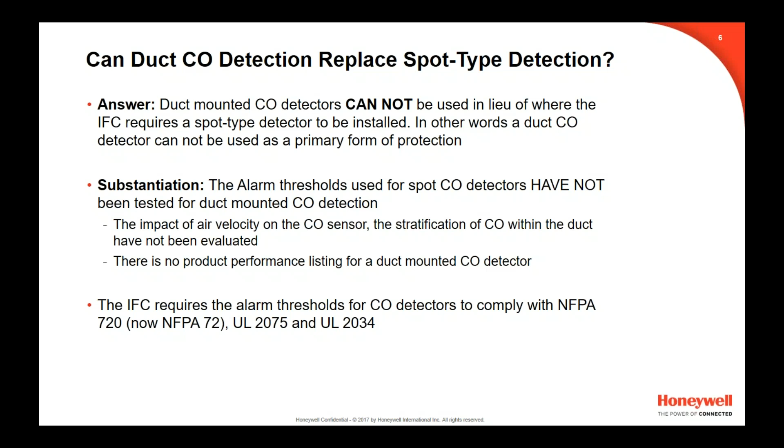So I should point out that even though a duct detector cannot be used as a primary form of protection, it can be used to initiate HVAC shutdown. In other words, a secondary form of protection.

Another frequently asked question has to do with the coverage area of CO detectors. Often an installer or system designer will have a large room that requires both smoke and CO detection. Because of the size of the room, it requires several smoke detectors, and the designer wants to know how many CO detectors are required.

The simple fact is there are no spacing requirements for CO detectors in NFPA 720, and that's because it's a scientific fact: the molecular weight of carbon monoxide is very close to being identical to air, and an HVAC system, when operating, will dominate the flow of CO within a building. When this HVAC system is running, it results in a well-stirred environment within the ventilation zone, room, or the entire building. Therefore, a CO detector can cover an area much larger than a smoke detector.

This topic is best covered by a 2007 Fire Protection Research Foundation study. This study was used by the NFPA 720 Technical Committee back in 2007 to determine the placement and the mounting requirements for CO detectors.

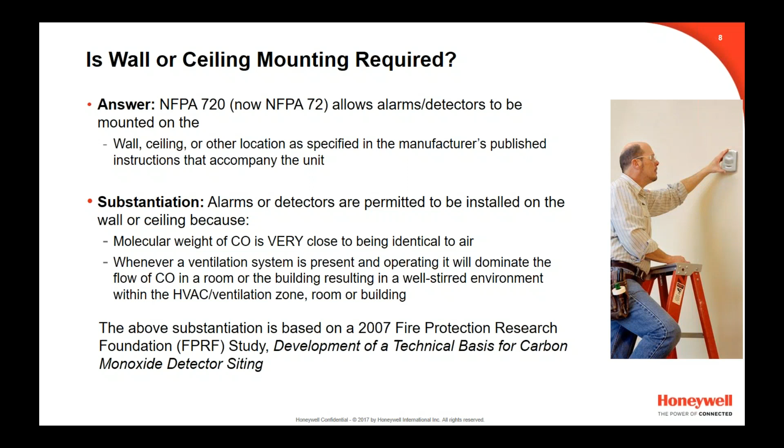As I just said, the scientific fact is the molecular weight of carbon monoxide is almost identical to air, and an HVAC system will quickly mix the carbon monoxide gas within a room, ventilation zone, or an entire building. Therefore, the placement is not dependent on mounting height. As a matter of fact, NFPA 720 is pretty specific, and it permits each alarm or detector to be located on the wall, ceiling, or other locations specified in the manufacturer's published instructions. Again, this topic is very well covered in that 2007 NFPA Fire Protection Research Foundation study.

When a building is required to have CO detection, and CO detectors are provided, a question I often get is: are carbon monoxide horns and strobes required throughout the building for occupant notification, just like a fire alarm system? The answer may be no, because NFPA 720 allows the system designer, building owner, or AHJ to decide if CO notification appliances should be installed throughout the building or limit notification to a specific room or area. Specifically, NFPA 720 permits occupant notification to be limited to the area where the carbon monoxide alarm signal was initiated, if and only if the alarm signal from that carbon monoxide detector is automatically transmitted to a constantly attended on-site or off-premise location.

More often than not, the integral sounder in the CO detector is sufficient for occupant notification if that alarm signal is automatically transmitted to a constantly attended on-site or off-site location.

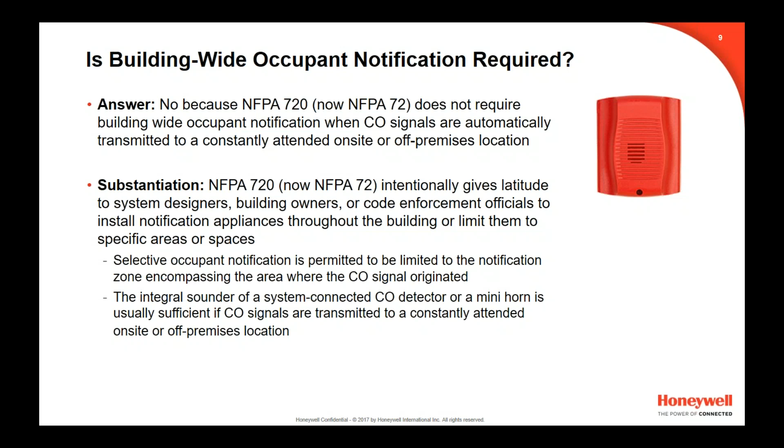So let's talk about parking garages right now. When a parking garage is provided with CO detection, the question I often get is: is the installation and maintenance covered by NFPA 720? The answer is no, because the scope of NFPA 720 covers products and systems intended for the protection of life. 720 does not cover CO detection for public health or worker safety for applications like underground or enclosed garages, warehouse loading docks, or automotive repair garages.

The alarm thresholds for these applications are typically lower than NFPA 720, and they are specified by the Occupational Safety and Health Administration, OSHA, or the National Institute for Occupational Safety and Health, NIOSH. The gas detection requirements for enclosed parking garages are addressed in the mechanical code.

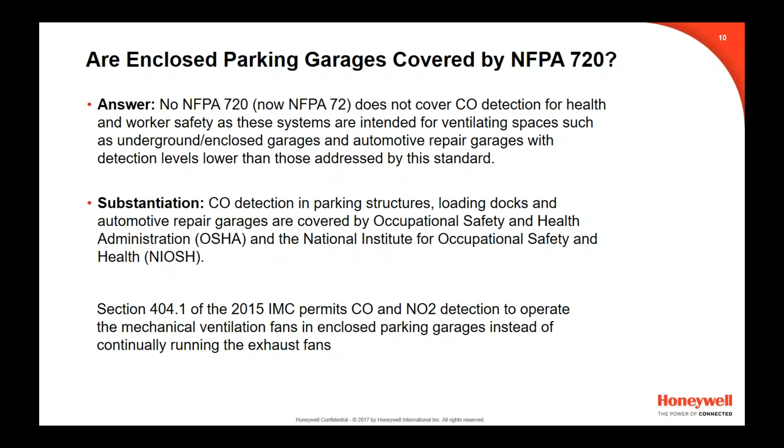Okay, let's now look at not only some of the key changes to the 2018 I-codes, but also the NFPA codes. A couple housekeeping slides before we actually start looking at some of these changes: I want to point out that the comments and opinions expressed during the presentation are mine only.

Yes, Kathy said I'm on a lot of NFPA committees, very involved in the ICC process, but my opinions do not reflect the official position of the ICC, NFPA, its employees, or any of the technical committee members. Also, I want to point out that we don't have enough time to really do a deep dive into these changes and requirements. We're going to provide a good overview, but it's essentially like a 35,000-foot overview.

Therefore, I highly recommend that you go out and purchase a copy of either the ICC or NFPA codes used in your jurisdiction. And I'll go one step further and say spend the extra money and purchase the NFPA handbook or the ICC commentary book. There's a wealth of additional explanatory information in there about many of the requirements we're going to talk about today, but other requirements as well.

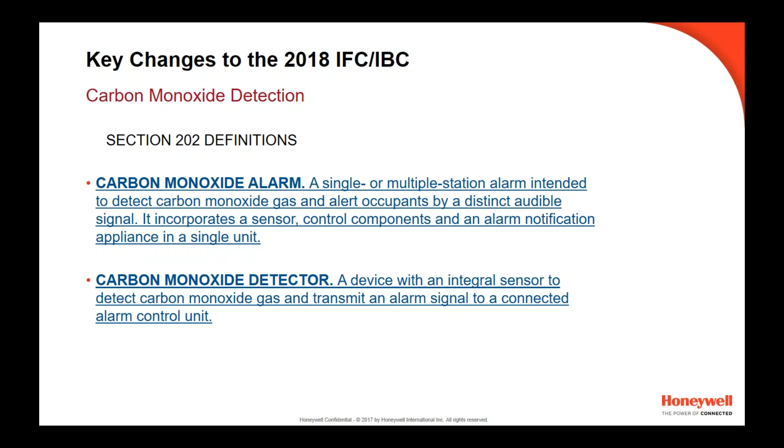So the next series of changes is intended to enhance occupant safety by providing notification to a responsible party of a malfunctioning fuel-burning appliance that is installed in a building, but located in areas remote from dwelling units and sleeping units. There are two problems with installing an alarm in these remote locations.

First, the UL product standard for CO alarms, UL 2034, is very clear: these alarms are only intended to be installed in dwelling units and sleeping units. Second, and probably more importantly, no one will hear the audible alarm signal because these remote locations are typically in an unoccupied area of the building and usually behind a locked door, such as a boiler or furnace room in the basement of a building.

Whereas if you install a CO detector in these remote locations, it will automatically send an alarm signal to the control unit and to a remote supervising station.

So let's review some of the requirements in section 915 relating to what I was just talking about. If you look at section 915.1 and 915.1.1, it requires CO detection to be installed in newly constructed I1, I2, I4, R, and E occupancies. The last section here, 915.1.2, covers buildings with a fuel burning appliance installed in sleeping units and dwelling units.

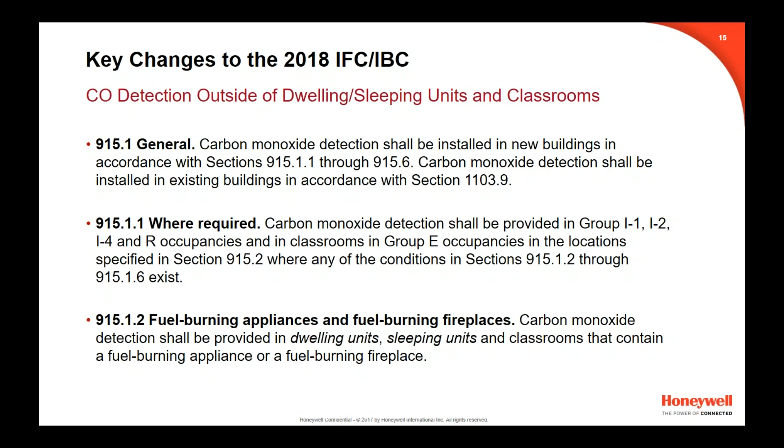So the first section to be changed is section 915.1.3, which covers dwelling units and sleeping units served by a fuel burning HVAC system. Alarms or detectors are required in each dwelling unit or sleeping unit served by that HVAC system. Now the exception states that detection is not required in each dwelling unit or sleeping unit if detection is provided in the first room or area served by each main duct leaving the furnace of an HVAC system, and the alarm signals are automatically transmitted to a constantly attended or approved location.

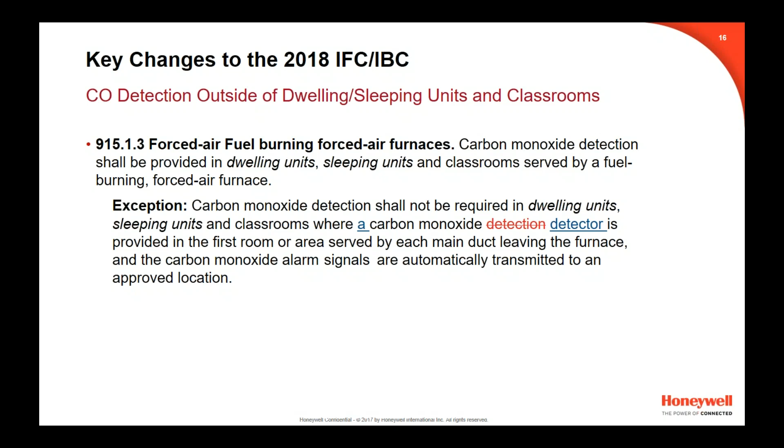As you can see, the term detection was replaced with the word detector, which means only CO detectors are allowed in the first room or area served by each main duct leaving the furnace of the HVAC system. The reason for that is that first room or area, more often than not, will be in an area of the building that is remote from a dwelling unit or sleeping unit.

The next section to be changed is section 915.1.4, and this covers applications where the fuel burning appliance is installed in the building but located inside the building remote from dwelling units and sleeping units, typically in a remote area of the building such as a boiler or furnace room in the basement.

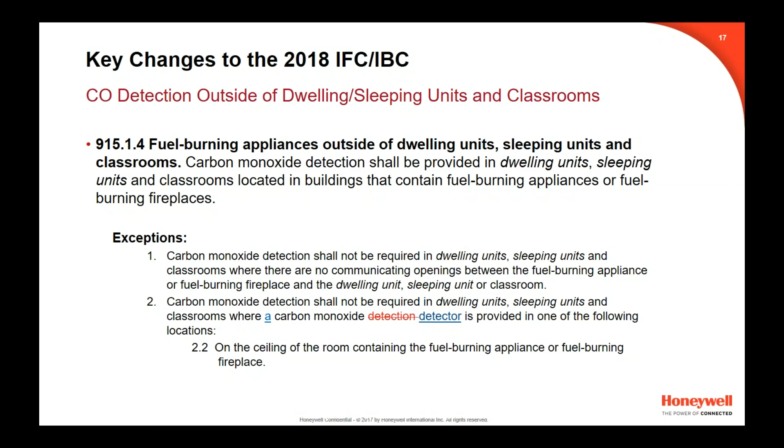Again, you can see the term detection was replaced with the word detector, which means that only CO detectors are allowed in that room containing a fuel burning appliance or the fuel burning fireplace.

Looking at section 915.1.5, this covers buildings with an attached private garage. Again, you can see down here that the word detection was replaced with detector, which means only CO detectors are allowed in an approved location between the opening to that private garage and dwelling units and sleeping units.

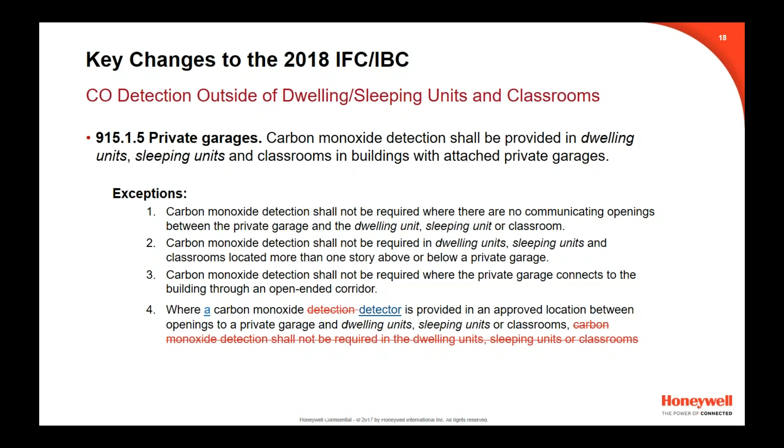If you look at this section here, which relates to newly constructed K through 12 schools, for the 2018 edition of the IFC and IBC, only CO detectors are permitted to be installed, by removing the word detection and replacing it with detector.

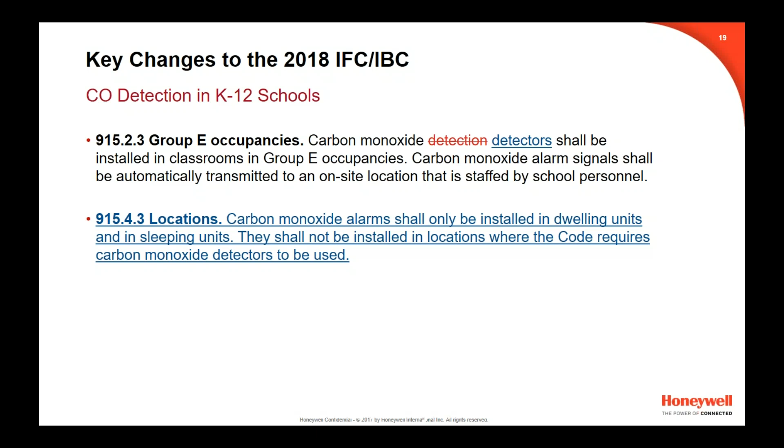Also, a new section here, 915.4.3, was added to clearly state that CO alarms can only be installed in dwelling units and sleeping units. It goes on to say that they are not permitted to be installed in locations where the code requires CO detectors.

All of the changes we've discussed so far have been relating to new construction, and they were found in the IFC and the IBC. The next several slides cover new CO detection requirements in the International Existing Building Code, or IEBC. The scope of this code covers existing buildings undergoing additions, alterations, or change of occupancy.

As you can see, a new section 402.6 was added, and this covers existing buildings undergoing additions, where CO detection is now required in accordance with the fire code and the residential code. There are several exceptions, which were taken verbatim from the residential code. The exception stipulates that CO detection is not required where work involves replacing roofing, siding, windows, doors, or the addition of porches and decks.

This change will help protect building occupants in existing buildings, but it will also provide consistency between the IFC, IRC, and the IEBC.

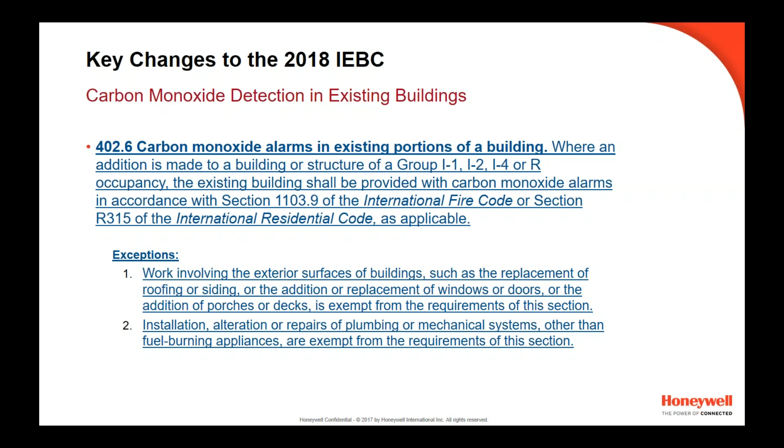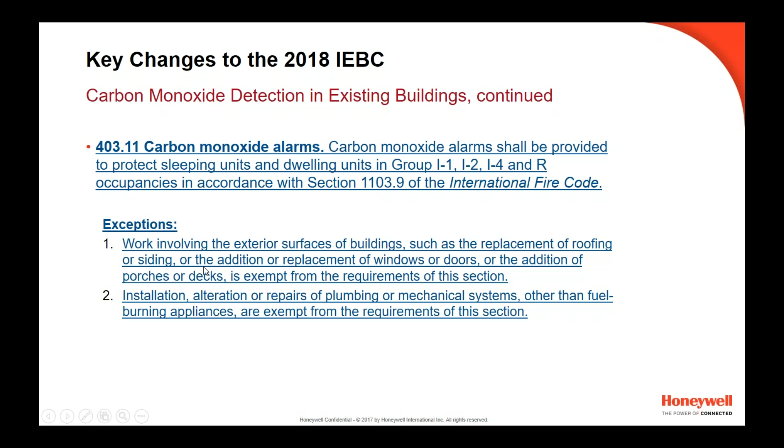Continuing with the IEBC, this section 403.11 covers buildings undergoing alterations, and CO detection is now required in accordance with the fire code in assisted living facilities, hospitals, nursing homes, daycare facilities, and all residential occupancies. As you can see, it has some exceptions, and these exceptions are essentially the same as what we just reviewed on the previous slide.

So if you look back, the IFC and IBC have required CO detection in newly constructed occupancies since the 2012 edition, but there were never any requirements in the International Property Maintenance Code to maintain these products and systems.

So if you look at this change in the IPMC, Property Maintenance Code, it now requires alarms and detectors to be maintained in accordance with NFPA 720, and requires CO detection devices to be replaced when they become inoperable or begin producing end-of-life signals.

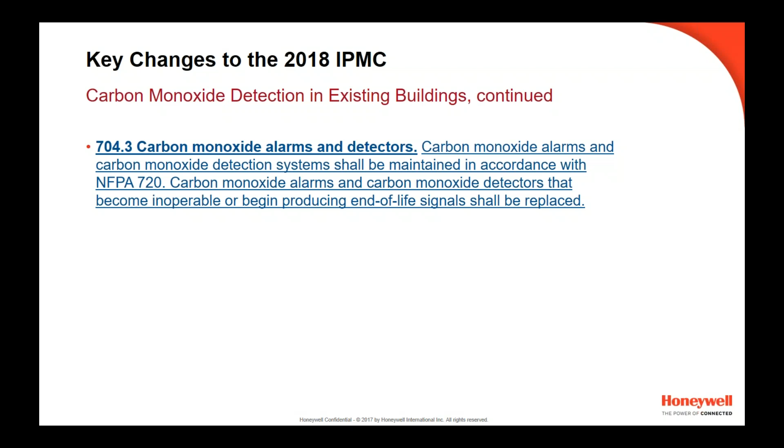Very quickly, I don't know if this will apply to this group, but it's important. This change relates to the residential code, and it will enhance the safety of residents by requiring CO alarms to be interconnected when more than one is installed in a detached 1- and 2-family dwelling or a townhome, not more than 3 stories. Interconnection provides early notification and evacuation of occupants when a CO leak occurs, for example in the basement where you might have your furnace, by notifying the occupants on the 1st floor and the 2nd floor.

Now, the residential code has required smoke alarms to be interconnected when more than one is installed for pretty much decades, and the ICC membership thought it was really time that the same applied for carbon monoxide detection.

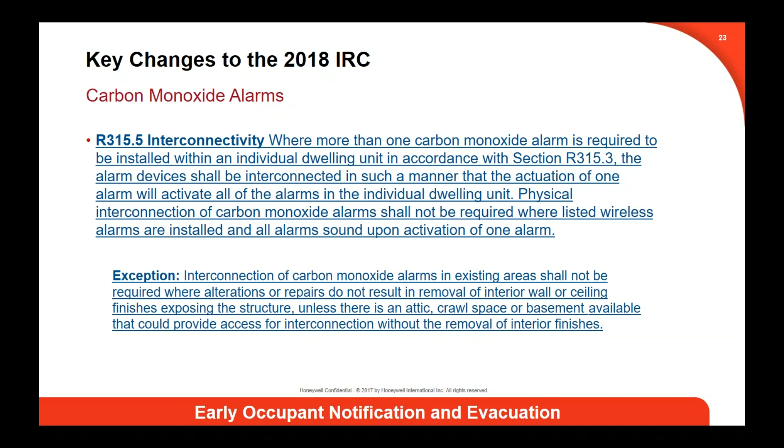Okay, Kathy, it looks like we're ready for our first break. Do we have any questions? We do, Richard, and we have 4 of them, and I'm going to start with the funniest one first, because this question starts out totally serious here. So it's a serious question: can a dirty litter box cause false CO alarms?

It could, and I say that because it depends on the sensing technology of the CO sensor. The one sensing technology used most frequently is the electrochemical sensor, and it is very sensitive to hydrogen and ammonia. That's why they always say that if you clean your detector, don't use Windex or something like that, because it could generate a false alarm. Just clean it with a damp towel or rag. So a litter box, that could potentially generate a false alarm, and that's one I have not been asked. So whoever asked that question, that's a first in probably 10 years. Kudos to you, I will check that out.

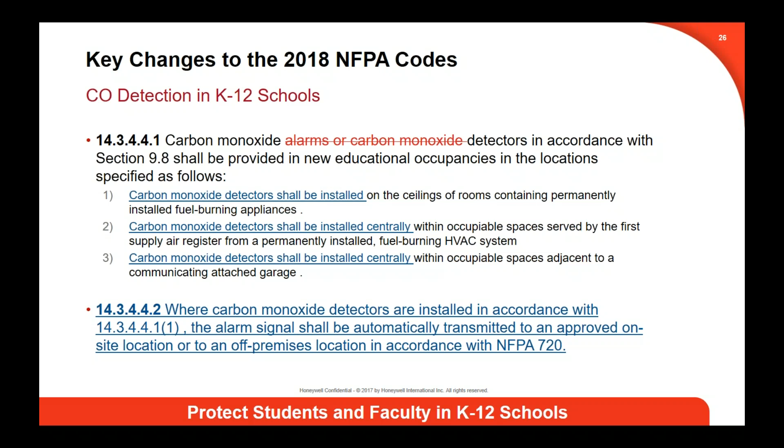The first change revises section 14.3441 so that only CO detectors are permitted to be installed in newly constructed K through 12 schools, by deleting the reference to CO alarms. Also, there's a new section, 14.3442, and it requires the CO detector to automatically send the alarm signal to an approved on-site or off-site location in accordance with NFPA 720.

Continuing with this, looking at hotels - Chapter 28 of NFPA 101 covers hotels. Section 28.3474 was revised so that only CO detectors will be allowed in locations where the fuel burning appliance is installed inside the building, but in an area remote from dwelling units and sleeping units. The code will continue to permit alarms in accordance with their UL 2034 listing, which is in dwelling units only.

Again, the new section at the bottom of the page requires the CO detector to automatically send an alarm signal to an approved on-site or off-site location in accordance with NFPA 720.

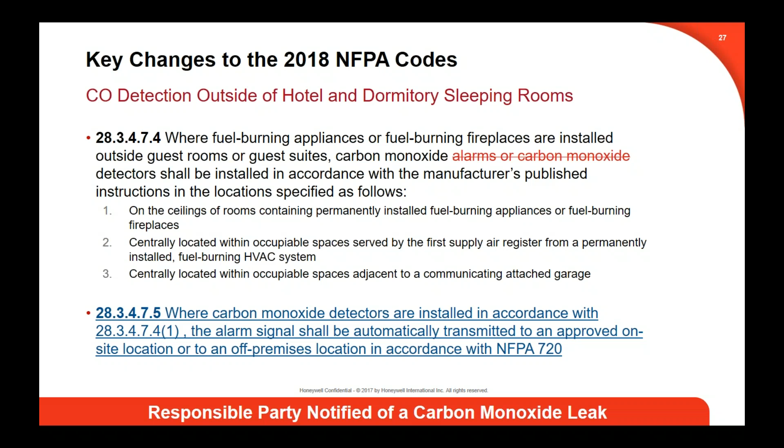Changing gears here, this deals with apartment buildings - Chapter 30 of NFPA 101 deals with apartment buildings. Section 30.3464 was revised so only CO detectors will be allowed in locations where the fuel burning appliance is located inside the building but remote from dwelling units, which is probably in the basement of the building for a boiler or furnace room. The new section 30.3465 requires that the CO detector automatically send that alarm signal to an on-site or off-premise location in accordance with NFPA 720.

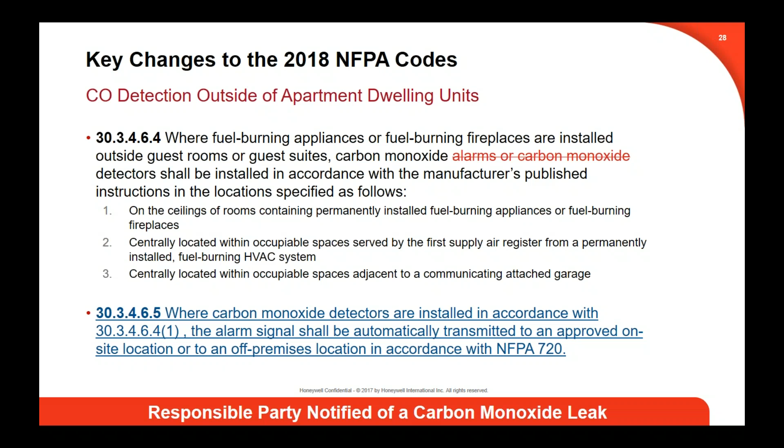It requires that the CO detector automatically send that alarm signal to an on-site or off-premise location in accordance with NFPA 720.

Now we're going to talk about board and care facilities. The ICC has required detection in halfway houses and assisted living facilities since the 2012 edition of the IFC and the IBC. For the 2018 NFPA codes, CO detection is now finally required in small and large residential board and care facilities. NFPA defines a residential board and care facility as an occupancy used for lodging and boarding of 4 or more residents that are in need of non-nursing care facilities. These residents are not related by blood or marriage to the owner or operator of the facility. Several examples are assisted living facilities, group housing for physically or mentally disabled people.

Looking at small board and care facilities - this is a type with fewer than 16 residents, and CO detection is now required by section 32.23441 when the facility contains a fuel burning appliance or when they have an attached communicating garage.

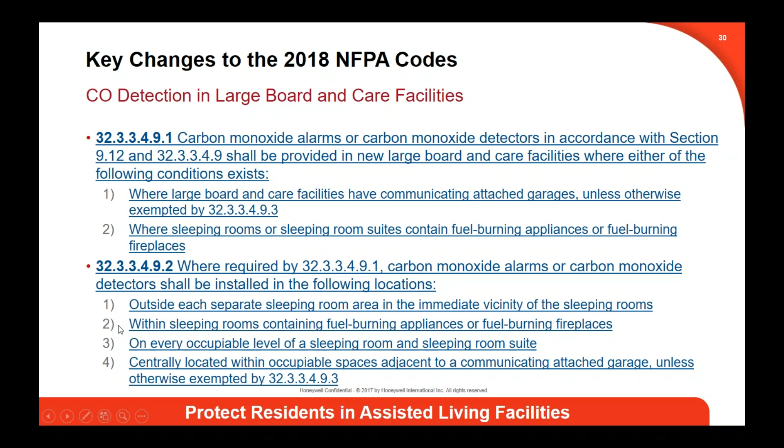However, continuing with large board and care facilities, in addition to the sleeping area requirements, CO alarms or detectors are required to be installed in non-sleeping locations: on the ceiling in rooms containing a permanently installed fuel burning appliance, and centrally located within occupiable spaces served by the first supply air register of the HVAC system.

So now there's a little bit of consistency between these NFPA codes and the I codes.

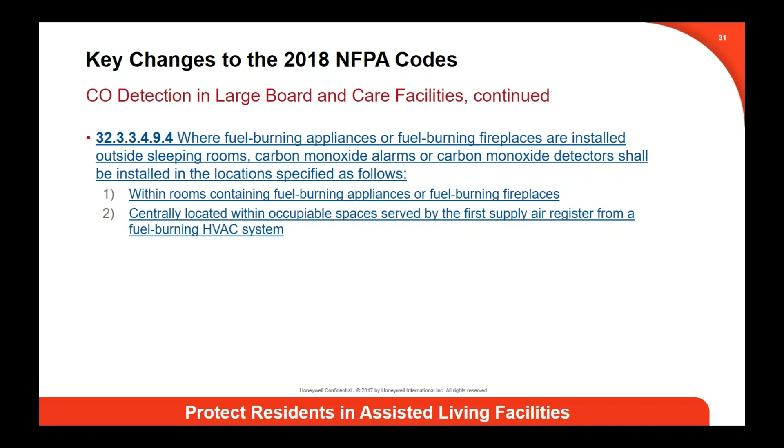This is a very interesting and important change, intended to protect the public and workers from serious injury or death from unintentional non-fire related CO exposure by mandating installation of CO detection devices in assembly occupancies. This proposal was developed by the National Electrical Manufacturers Association, and it requires CO detection in assembly occupancies like restaurants, nightclubs, motion picture theaters, and places of religious worship.

CO detectors are now required in three locations: on the ceiling of the room containing the permanently installed fuel burning appliance; centrally located within an occupiable space served by the first supply air register from a fuel burning HVAC system; and centrally located within an occupiable space adjacent to the communicating attached garage.

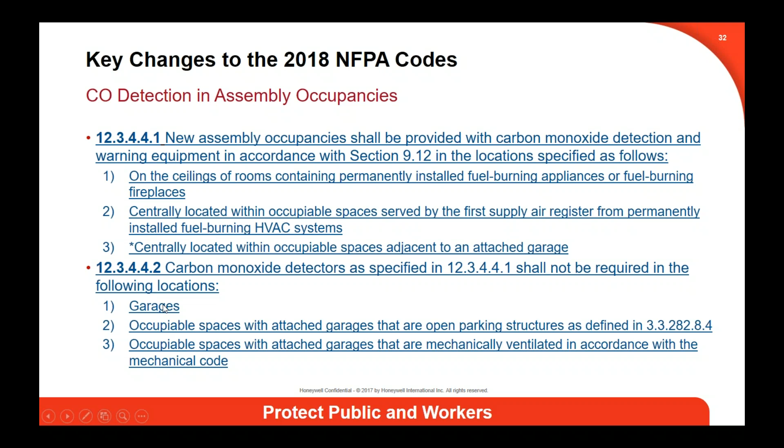Now this section at the bottom of the page is pretty important. It says where CO detection is not required. Obviously you don't want to install CO detection in garages, but that's very important.

Okay Kathy, I think we've got time for a couple more questions. Sorry, I was muted. We have a couple - did I put you to sleep? No, no you didn't, I had to take another call.

The first question: does the reference to a 10-year lifespan refer to both indoors and garages?

Basically, check with your manufacturer's published instructions. I probably misspoke - to my knowledge all of the indoor products are at 10 years, but who knows, there may be somebody out there that just introduced one that can go 12 years, or maybe somebody is still at 6 years. But the same thing goes for detectors installed in parking garages - you really need to check with the manufacturer's published instructions.

Okay, looks like there are two more at this point. What is the immediate vicinity? What did you mean by that?

That's one I get quite a bit, and I hate that term because it's really undefined and very difficult to enforce. But what I always like to say is that it says in the immediate vicinity of the sleeping room or bedroom. So what you want is sufficient audible level at the pillow to wake someone up. If you're installing a CO alarm or detector outside the bedroom, NFPA 720 requires 75 dB at that pillow with the door closed. And if you can't get 75 dB, you're going to have to install a CO detection device or horn inside the bedroom. But that's typically what I like to say about immediate vicinity - make sure you have 75 dB at the pillow.

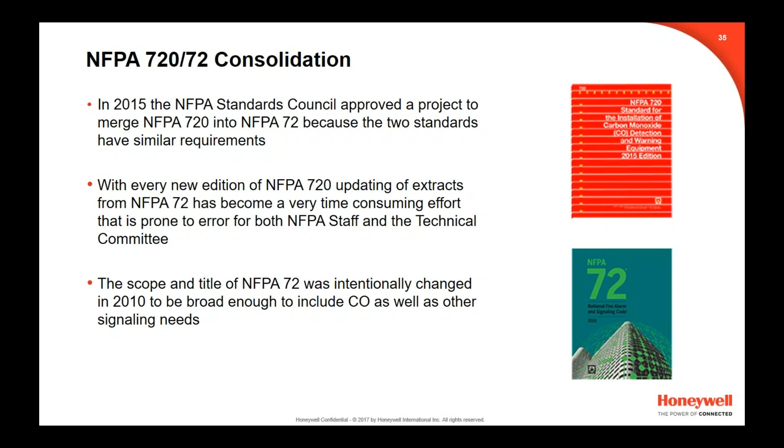So let's take a few minutes here and review some of these key requirements, not all, but some of them that were merged over from 720 into 72. It will actually be a good review of some key points and will emphasize some of the discussion that we've had already today.

So the first chapter we'll look at is chapter 17 of 72. This chapter covers all types of initiating devices that are connected to a control unit, and a new section relating to CO detectors was added, that being 17.12.

If you look at 17.12.1, it requires detectors to be installed in the following locations where required by laws, codes, or standards. Number one, on the ceiling in the same room as a permanently installed fuel burning appliance. Makes sense, that's a no-brainer.

Number two, centrally located on every occupiable level and in every HVAC zone of a building. That's pretty expansive. Number three, outside of a sleeping area within 21 feet of any door leading to a sleeping room. Number four, other locations where required by applicable laws, codes, or standards. And number five, it allows for a performance-based design in accordance with section 17.3, which is typical with smoke detectors.

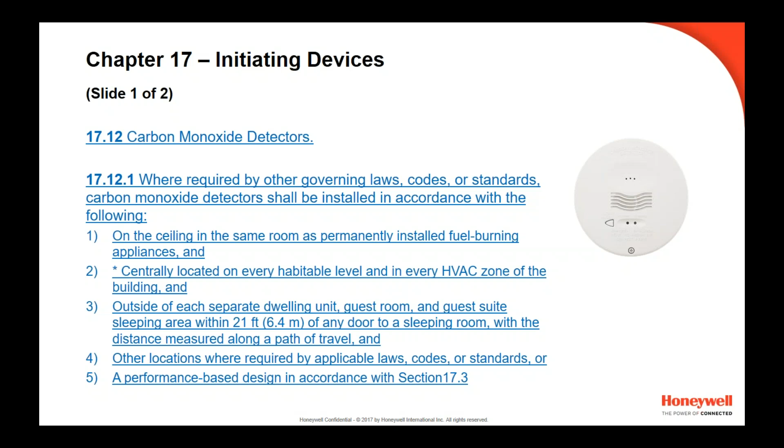So if you look at item number two, 72, and formerly 720, was requiring a building to have CO detection in every occupiable level and every HVAC zone of the building. That would a lot of times just require CO detectors throughout all areas of a 4-story, 5-story hotel, where that might be overkill. You may only need it in the room where there's a fuel burning appliance, and that's where the code requires.

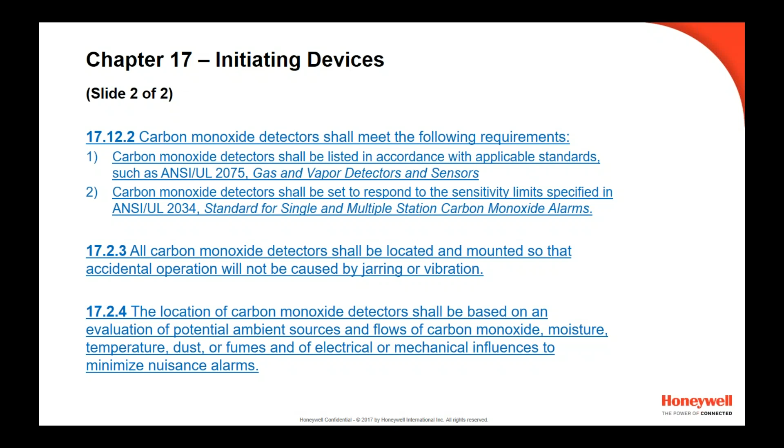Okay, let's switch gears and look at chapter 18 of 72.

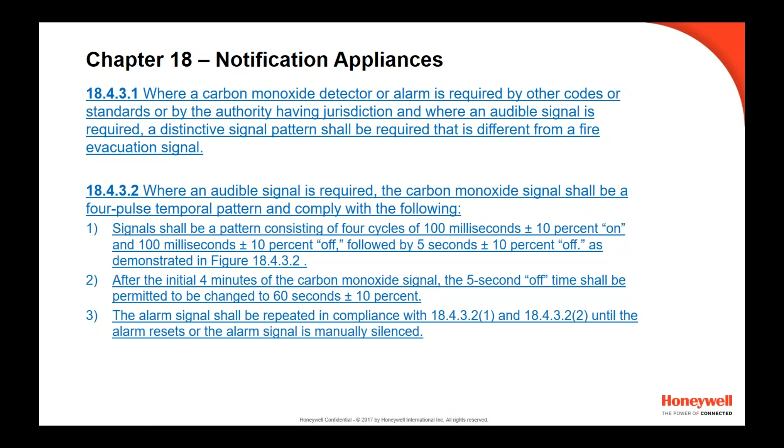This chapter covers all types of notification appliances connected to a protected premise control unit. Sections 18.4.3.1 and 18.4.3.2 require the audible CO alarm signal to be distinctive to CO, different than the Temp 3 audible fire alarm evacuation signal, and it requires this audible CO alarm signal to use the Temp 4 audible alarm pattern, which was a question we just got a few minutes ago.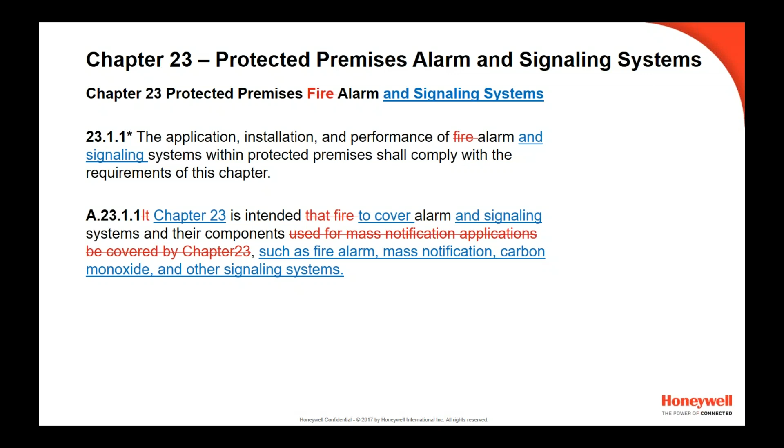Let's switch gears and look at chapter 23, which in the past covered requirements for the installation and performance of fire alarm systems at the protected premise. The first change to chapter 23 changes the scope beyond just fire alarm systems to include all types of signaling systems, paving the way to incorporate the requirements from 720 into 72. The text in the body and annex is clear that the scope of chapter 23 covers carbon monoxide detection.

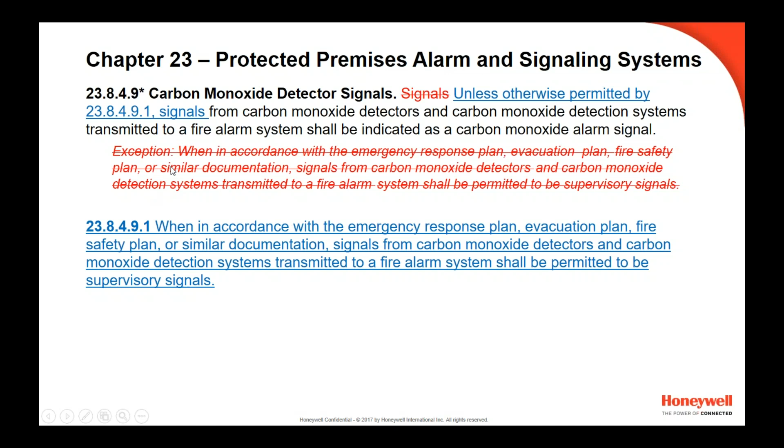Looking at paragraph 23.849 of the 2016 edition of 72, it required signals from an activated CO detector transmitted to a fire alarm system to be indicated as an alarm signal. But there was an exception where, if required by the AHJ, the signal transmitted to the fire alarm panel could be a supervisory signal instead of an alarm signal. To comply with NFPA's manual of style, which tries to do away with exceptions and put requirements into actual requirement language, the exception was replaced with this new requirement.

These three sections address when and if building-wide audible and visible notification appliances are required. NFPA 720, now 72, permits but does not mandate the installation of CO horns and strobes throughout the building. Looking at new section 23.8612, it requires occupant notification of a CO detection system to be throughout the protected premise, except as permitted by 23.8613.

So what does 23.8613 state? It permits selective mode occupant notification to be limited to the notification zone encompassing the area where the CO alarm signal was initiated, if and only if the CO alarm signal is transmitted to a constantly attended on-site or off-site location.

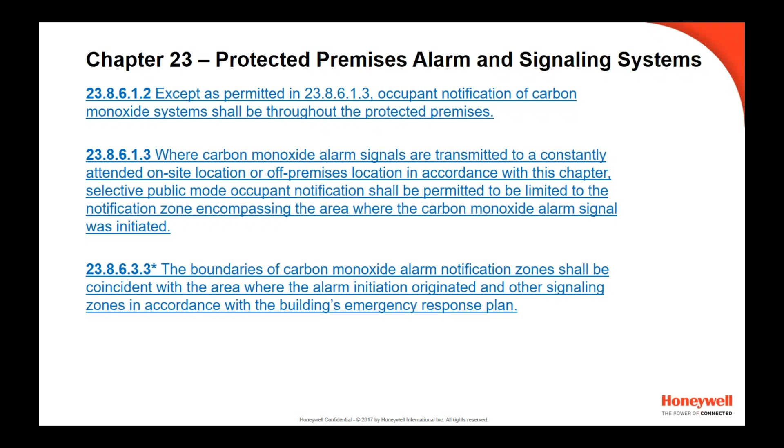And 23.8633 covers the boundaries of the notification zone, which is the area where the CO alarm signal originated, and other signaling zones in accordance with the building emergency response plan. So the building emergency response plan may say they want building-wide CO horns and strobes, but it may also say they just want to limit it to where the CO alarm signal originated, and maybe a few different rooms within the building. It's really up to the evacuation plan.

Let's take a minute to look at chapter 29. This covers how to install, service, and maintain single and multiple station CO alarms and household CO detection systems. It's important to note that chapter 29 is not an occupancy chapter; rather, it covers all types of locations where a CO alarm may be installed.

A new section, 29.6, relates to carbon monoxide detection. New section 29.611 says that CO alarms and detectors are required in the following locations, which we've pretty much covered so far in this presentation, or where required by laws, codes, or other standards.

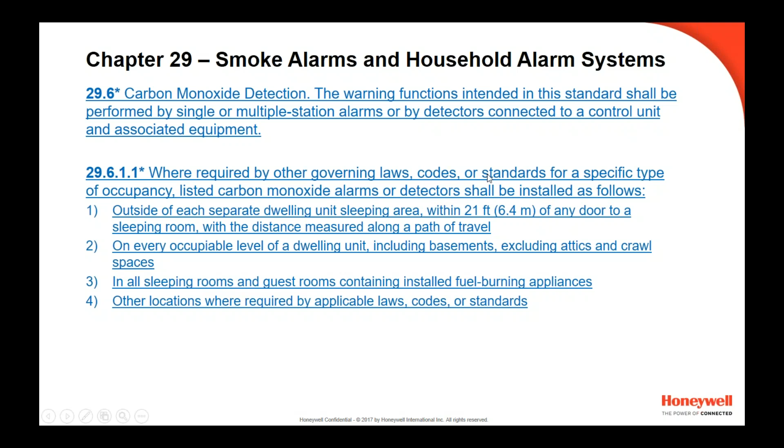Looking at 29.612, this goes back to one of the frequently asked questions. It says each alarm or detector shall be located on the wall, ceiling, or other location as specified in the manufacturer's published instructions. And the interconnection of alarms—not detectors, but alarms—applies where you have more than one alarm within a dwelling unit or suite of rooms, so that when one goes off, they all go off.